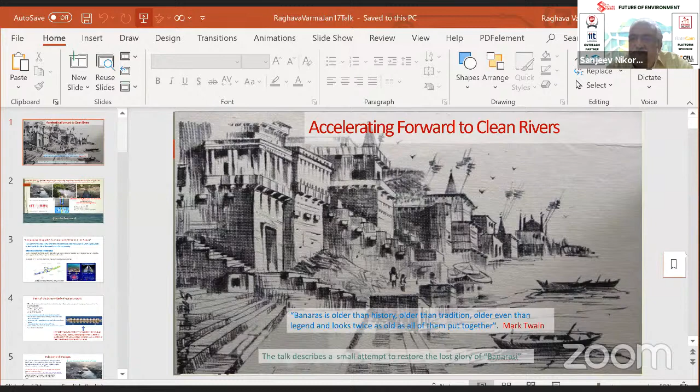You're on mute. Thank you. Thank you so much. I don't know why my video is not coming on. That's okay, sir, it will not come on when you are put on screen sharing, so don't worry about it, go ahead. Okay, yeah, so can you see my screen now? Yes, we can see, please go ahead, sir. Yeah, we can see your screen, Professor.

So the topic of my lecture today is accelerating forward to clean rivers. I would begin with a quote from Mark Twain, that Banaras is older than history, older than tradition, older even than legend, and looks twice as old as all of them put together. There are countries which are spending for a building for their heritage; our whole city is a heritage, and so we are all custodians of that heritage. This is a very small attempt to restore the lost glory of Varanasi, spelt in Pali as Banarasi, from which probably the name Varanasi originated.

So what is this? We want to develop the first of its kind high-intensity compact superconducting electron accelerator in collaboration with scientists from Japan, which will fit into narrow bylanes of Varanasi to transform the landscape, and has many other societal benefits, which I'll touch on in the last slide. These are some pictures of the Assi River emptying its content into the Ganges, and we would like to put a compact superconducting accelerator there.

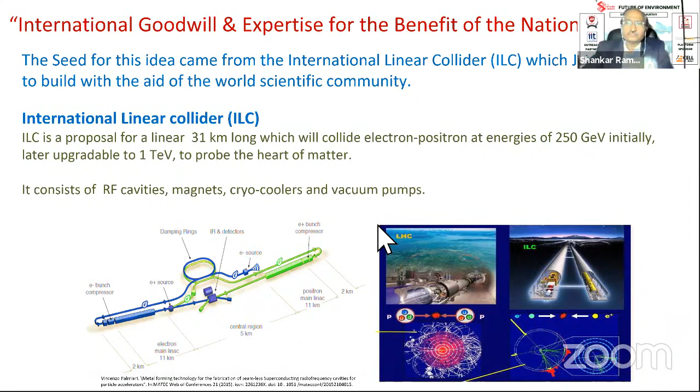For our purpose, it consists of RF cavities, radio frequency cavities, magnets, cryocoolers, and vacuum pumps. The idea is that we can study the properties of the Higgs boson, discovered at LHC, much better, because you will be colliding two elementary particles, electron and positron, instead of composite particles like the protons at LHC.

The heart of the system is the radio frequency cavity, the key element of an accelerator which stores electromagnetic energy and imparts it to charged particles. There are two kinds of cavities: normal and superconducting. For superconducting cavities, the ILC foresees around 20,000 nine-cell cavities as shown in this figure, and they can increase the energy of the electron by 34 million volts per meter of length.

All the points I mentioned are very important for the application we have in mind. These cavities have been widely tested for stable running for more than a decade. The Japanese have perfected the art - they are very compact and very energy efficient. These cavities have been optimized for heat losses and for wall-to-accelerator power efficiency, because the accelerator has to run round the clock, round the year, for several years. All this optimization would be very essential for the application I have in mind, which I describe below.

Use a similar cavity of similar length and similar dimension in phi, and make a superconducting high-intensity accelerator which can accelerate electrons up to 1 to 2 MeV, to treat the effluents flowing into our rivers. So the system becomes very compact, which I will come to.

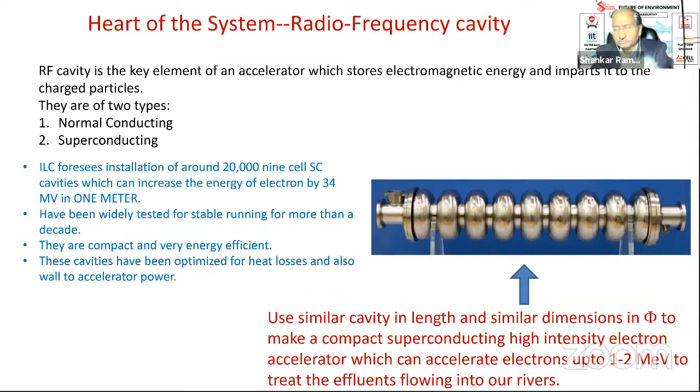Without wasting any more time, I come to the topic at hand, and that is pollution in the Ganges. It is well known - I will not go over it due to shortage of time - that mainly it's the domestic and industrial effluents which are flowing into the Ganga. And Assi is a particular case.

Now, when I performed the last rites of my father, I did take a dip there. And if you take a dip with such high coliform levels, you are very likely to develop antibiotic resistance, which would lead to serious health hazards. So this needs to be tackled immediately.

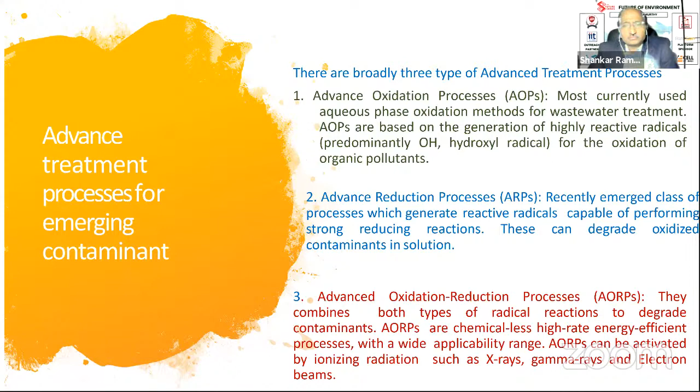And hence it's common sense that they would work better than the first two. So here, just quickly going over these are the conventional water treatment facilities. Bioremediation has come - I have not listed it because it is a green process, but with temperature varying from 0 to 50 degrees, one has to fine-tune it, and it's not so effective if you want to treat coliform. If you see the row on advantages and the row on disadvantages, each one comes with baggage, and that baggage cannot be just solved in one place while disturbing another. Some of them generate carcinogenic waste which could be harmful, or otherwise are just sent to the landfill, so we are creating problems for the future.

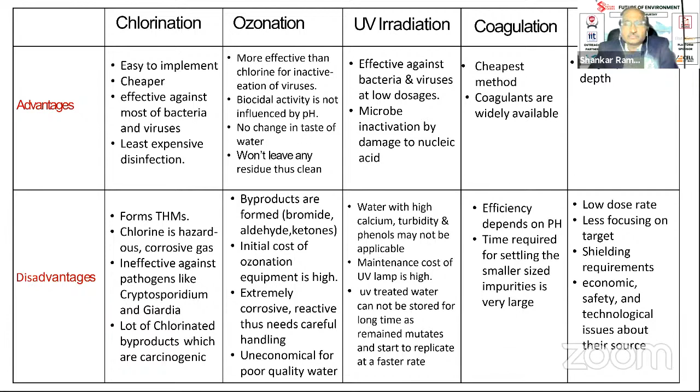So let's talk of these AORP, or advanced oxidation reduction processes. Ionizing radiation is an electromagnetic wave with a frequency higher than 10 to the 17 hertz, or energy greater than a few electron volts, so that the water can be ionized. It can be excited or it can be ionized. The excited water gives you hydrogen radical and hydroxyl radical. The ionized water gives you, again, hydroxyl radicals and aqueous electron, as we call it, hydrated electron.

So hydrated electron and hydrogen atom serve as reducing agents, and hydroxyl radical and hydrogen peroxide, which is formed after combination, act as oxidizing agents. The G value determines how much such radicals would be produced, whether you use a chemical or radiation. And normally it is seen that the G value for these advanced oxidation reduction processes is much greater than conventional oxidation processes, so they'll be more effective.

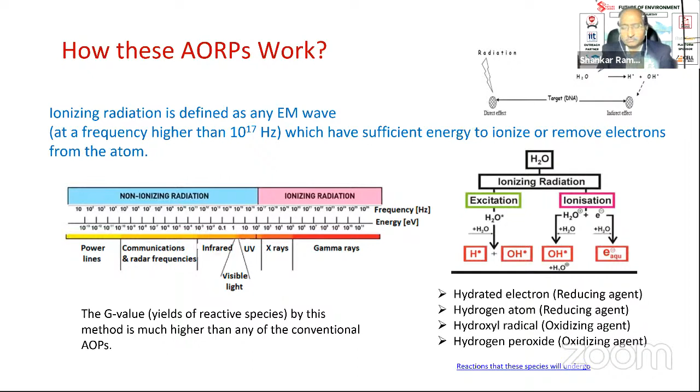So why an electron beam accelerator? First of all, it's an eco-friendly technology. There is no secondary waste generation. We don't need any catalyst and heating. It is compact, reliable, energy efficient, and you can switch it on and switch it off as you wish.

You can also use this instead of needing chemicals such as chlorine. As I said, it is chemical-less, so that is much better.

It removes organic impurities with radiation chemical reactions. It removes color by destruction of double bonds in azo compounds. It removes odor by opening rings in aromatic compounds. The E. coli DNA is destroyed, so there is no question of it mutating. Nearly 100% destruction has been found, and endocrine disruptors are removed. It removes metal by redox conversion, so they take a metallic form, settle down, and you can sedimentate it. So I won't go into further details.

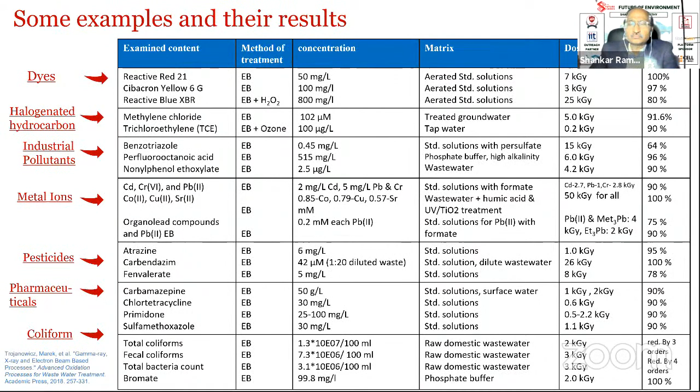I will just present one example. There are many commercial examples, and for sustainability it stands to reason that we should use the electron beam. This is a commercial plant design for wastewater from a paper mill in Korea, and the major product is newspaper. It uses about 18 MLD of water per day. They were using coagulation and then bioremediation, and they could reduce the BOD and COD to 20 and 45, which is slightly higher than what the National Green Tribunal demands.

So what they did was combine it with an electron accelerator, numbered 5, and then a sedimentation step, numbered 6, and they could reach the BOD and COD levels to 5 and 20, with a flow rate of 15,000 meter cube per day. They had to put 3 electron beam accelerators, total power of 300 kilowatts, but they could recycle 70 to 80% of the water, making the process very green, and additional removal of impurities was up to 80% in total organic compounds.

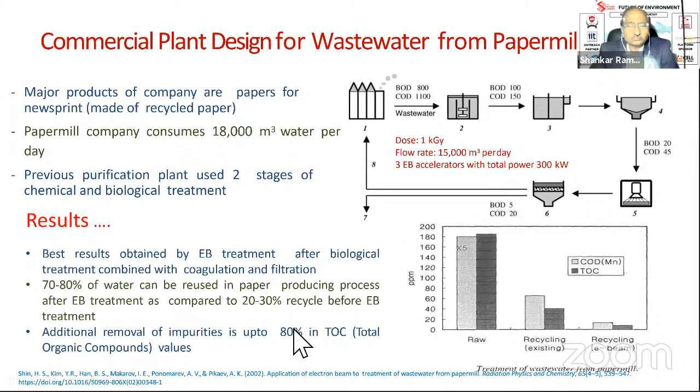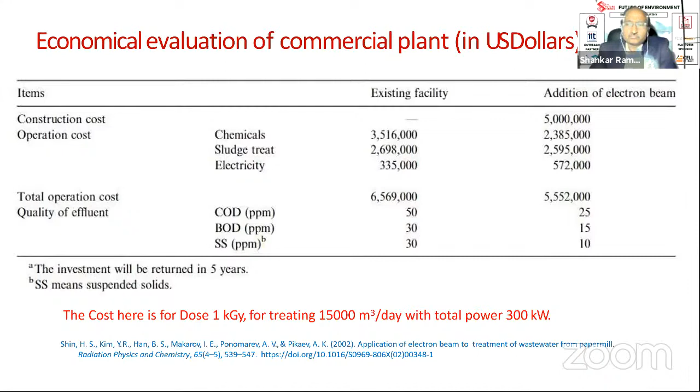The next slide shows that you can have your cake and eat it too, because they claim the investment will be returned in 5 years. So all the cost of constructing it, including equipment and running costs, they could get it back in just 5 years, and then you get much better quality water that you can circulate much more. The paper is from a reference, so I don't need to go further on it.

But there are so many of them I saw over the years. The first study started in the US and then it has spread, but not very fast. Why? Because these normal conducting accelerators become very large in size, and you need very high power to make it economically viable. So the size becomes large, and when you make the size large, the reliability suffers.

Then the cost of shielding for radiation is very high, 40 kilowatts or 300 kilowatts, so you have to shield it, and the cost of shielding goes proportionately high. And then the footprint becomes very large. So it will not be able to fit, for our country, like near a river, if you have seen it there, it will not fit. Footprints become large, and in any case right now with space available at a premium, it always helps to save as much footprint as possible.

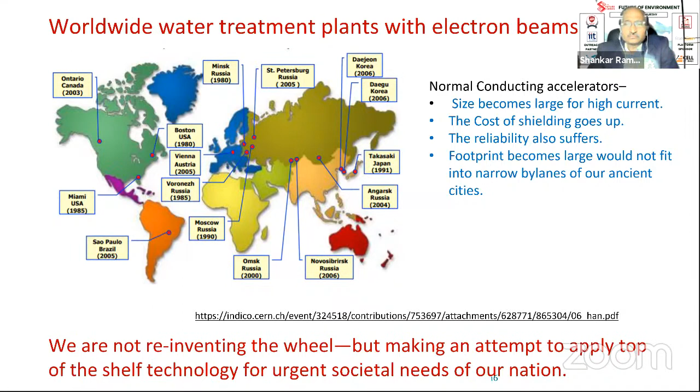So this is our conceptual prototype of a purification system. This is the way you design this cavity, superconducting cavity, which has already been done at IIT Bombay. The fabrication, we don't have such facilities. Normally for superconducting, because they have been optimized for heat losses, the total heat budget that they quote is about 4 to 6 watts.

Commercially, you have available cryo coolers at 2 watts, now 4 watts, and now even 8 watts are available. So by the turn of a switch, we can make this work, because if we had to use liquid helium, then this would not have made too much sense, since the footprint would have become larger.

So you first pre-treat the water, then you irradiate, and then you filter it out, or you post-treat, and then you can allow it to flow.

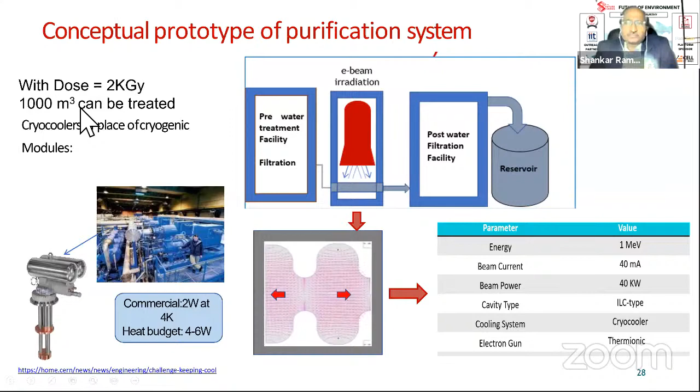We have estimated that we can get about 2 kilo gray, so 1000 meter cube, or 1 MLD, can be treated very easily. The economics, if you have to improve it, there are 2 factors: reduce the required doses.

These experiments we are doing presently, for which he also invited Dr. Ramurthy, is to optimize the dose by combining it with conventional treatment, so that you can work with lesser dose, and you improve the efficiency by going to superconducting.

So higher efficiency, up to 80%, you can get from wall to accelerator power, which results in low current, low cost; high current, high power means more water can be treated. Again, low cost. Typical area occupied would be few meters square, low footprint, again saving in cost.

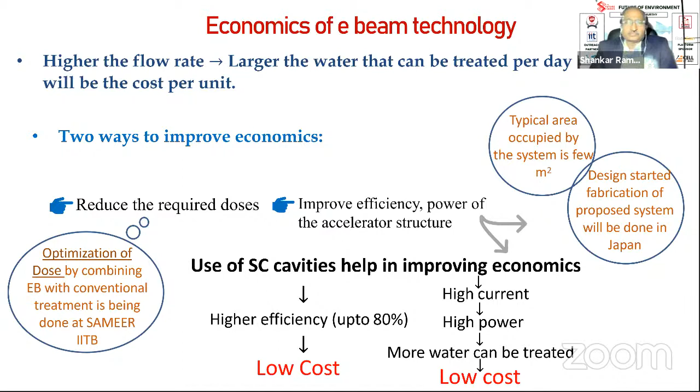So the milestones reached so far: this work is a part of a project that has been submitted on our behalf by the Government of India to the Government of Japan under the Science and Technology Research Partnership for Sustainable Development.

This is a scheme of the Government of Japan. Under this scheme, the scientists in Japan have also submitted a similar proposal to Japan Science and Technology, agreeing that they will work with us on this project.

The project will now be evaluated by Japan Science and Technology, and if approved, would be funded fully by the Government of Japan. It funds only 10 projects worldwide in a year, but we had submitted it last year. There was some lacuna there about a social agency not being part of it, so they had asked us to come again.

Now National Mission for Clean Ganga is a part of the proposal and has agreed to put the pilot plant. They have been very kind at Assi Ghat. SAMEER, which is housed at IIT Bombay, IIT BHU, and Department of Physics BHU are also part of this proposal. We have already designed the cavity at Mumbai, as I showed in the figure earlier.

Fabrication would be done in Japan with our collaboration. We should be able to treat about 2 million liters of water per day. As Assi has a much larger flow, we would be treating only a part of it, so we will have to divert it. National Mission for Clean Ganga has agreed to help us in this and take necessary permission.

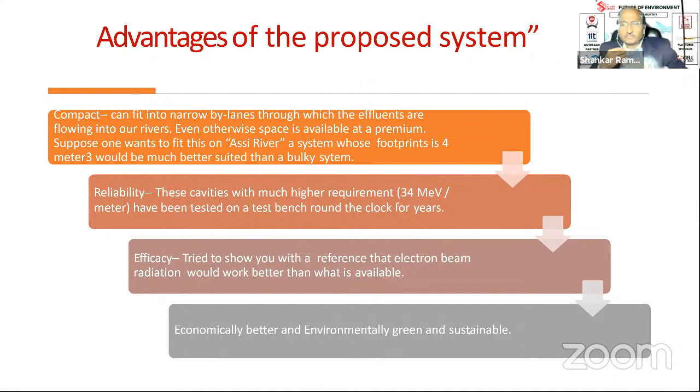So advantages, just summarizing: it is compact, so it can fit into narrow lanes. Reliability - these cavities, much higher requirement, 34 million volts, have been tested on test bed round the clock for years, one reference only, as time permits. It's very efficient, and economically and environmentally it's green and sustainable.

There are other applications. Professor Verma, I think we have just got a complete overview of your tremendous application and creativity in collaborating with the Japanese companies and aligning with Indian requirements, particularly with the Ganges river, which is contaminated in Banaras. It's been a very high level technical revelation to us in what next generation technology in water application is coming, which has always been more construction oriented by the sludge oxidation process, but you have brought a complete revolution with regards to changing and packaging it in a simpler application way.

But of course, the fraternity has to really look into the real technologies and the application. So I congratulate you, Professor Verma, and then we have a long way to go in getting this launched first as a pilot and then next on a commercial launch, so that we bring about really the next generation application, the wastewater treatment. I thank you.

Professor Verma, we will look forward to connecting with you and seeing how this can be more visible to the whole fraternity in the water sector. Thank you.

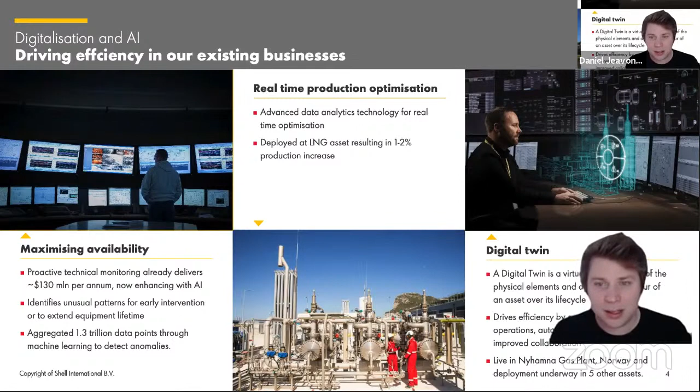But I talked about openness at the start, and the importance of openness. And in many cases, we recognize that many of the processes that we run today need to be monitored, often by external regulators, often by other parts of the business.

In the case of groundwater monitoring, which I thought was a good example to share with you, it's sort of all of those things. We have external consultancies that come and look at the groundwater underneath our assets and our sites. We need them to submit their data in a consistent format. We need to perform consistent analysis on that. And we need to be transparent with the regulators and also with the environmental consultants within Shell to make sure we're making the right decisions.

I think the amazing thing about this example, I think it's an example of the way we have to move forward, is total transparency and open source. And so we've worked with the University of Glasgow to develop what we'd built internally, which we call GWSDAT, as an open source framework. It's now been adopted by the UK government, also in the US as well, and it's growing elsewhere. Many companies have adopted this as a standard.

And effectively what it is, it's a tool that creates consistency. So when we say this is the environmental impact that we see, and we're going to do this to address it, it's completely transparent to the regulator that that is the case, because we're using the same framework to analyze those results, the same data science, and all of that has been subject to audit and review, and it's done in a transparent way with an academic institution. And I think this is much more the way in which we're going to have to do things going forwards.

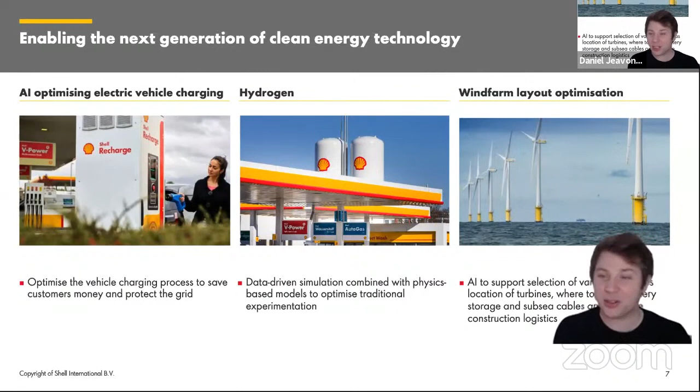And then, of course, we're also investing heavily in wind technology. And as we do that, we need to optimize the layout of these sites to make sure that they generate the maximum power output, and also that they're combined with things like hydrogen and battery technology in effective and sophisticated ways. And again, there we rely heavily on optimization technology, on physics-based models to understand that, and then to design the way in which we're going to roll out these wind farms, and then to make sure that they're operated in the most effective way. So very similar to some of the optimization approaches that I talked about in our traditional facilities, now being applied in the wind domain.

Building on that theme, I also wanted to make clear that we're not trying to do this all by ourselves. I talked about openness, and I think the key thing here is that we are trying to work with partners in academia, with startups, and many of them in India, to bring in the best ideas, because these environmental and energy problems we have as a society are not easy to solve. In many cases, we believe the technology is not fully there. So what we're pushing for is a number of approaches whereby we can bring in brains like yours to work with us to help solve some of these problems.

So last year we ran the wind farm layout optimization hackathon. If you haven't seen that, check it out online—it's on our website, and you can also find it on LinkedIn if you search back through posts. The key thing about that hackathon is we particularly focused on India and asked some of the brightest minds to look at some of our data sets and say, what are we missing? What are the better ways of approaching this problem? We got some fantastic results from that.

We're trying to repeat that this year with Game Changer, again looking at waste management and how we can help frontline waste workers, particularly in India, with solving some of those really tough challenges you face, and trying to open source some of the data sets we have around that.

And then we also have a startup program called E4, where we run annual cohorts of startups. We invest in those startups, we mentor them, and we look to accelerate their scale-up, particularly in the energy sector.

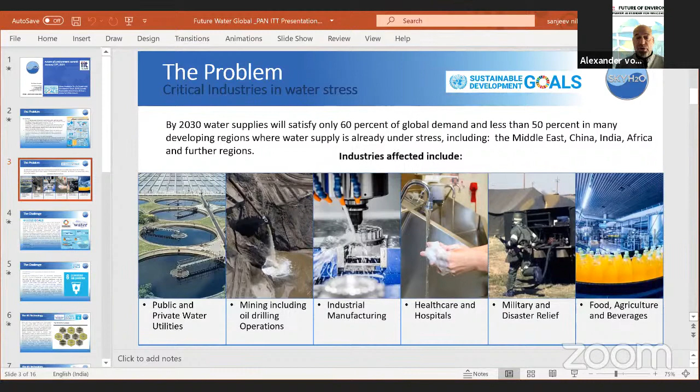And the third way is what we're doing at Sky H2O, and that's atmospheric water generation, which is essentially squeezing the water out of the air. We can go to the next slide, please.

The air has a very significant amount of water in it globally. Some would say that there's essentially as much water in the air, in the atmosphere, as there is almost all freshwater sources combined. And with climate change, with temperatures rising, we have much more evaporation, which is creating even more water in the air. In fact, it's been proven or said for every 1 Celsius increase in global temperatures, we end up having 7% more water in the air. In fact, this additional water in the air is the primary culprit behind the dramatic weather changes that we're seeing, where storms tend to be bigger and stronger.

So it's that water in the air, which is the resource that atmospheric water generation uses to create fresh water. Next slide, please.

Atmospheric water generation, as opposed to any other technology, is really game-changing in its business model or applications, because now, really for the first time in the history of man, we can make water at the location where the water is needed without having an original source of water. So again, the real difference between atmospheric water generation and any other form is any other form requires an original body of water, be it a river, a lake, groundwater, ocean, etc. In the case of atmospheric water generation, our resource is the air, which is everywhere.

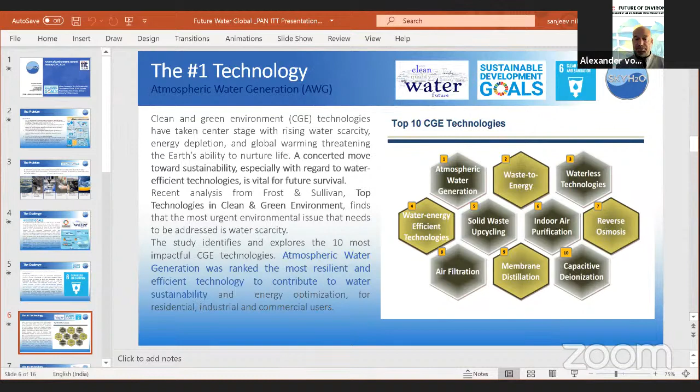And I draw a very similar comparison to atmospheric water generation. It can be rolled out quickly and at the locations where needed. Next slide, please.

So again, Sky H2O, our mission is to be the world's greatest supplier of atmospheric water generation systems. And what we're doing is we're scaling this young new industry to make bigger systems, to make more water.

So if you look at the competitive landscape of this young new industry, you might find a dozen or so companies around the world, including a couple from India. But what you'll find is most everybody is only able to work with small systems that might be appropriate for residential or some small commercial application. At Sky H2O, what we're doing is we're making bigger, more robust systems that work very well for larger commercial, industrial, and government type applications.

We have, as a starting point, introduced to the market about a year ago our flagship system that we call the Maximus AWG. That system essentially looks like a 40-foot container, and it's rated to produce up to 10,500 liters of fresh water a day. Let me explain the rating for a moment.

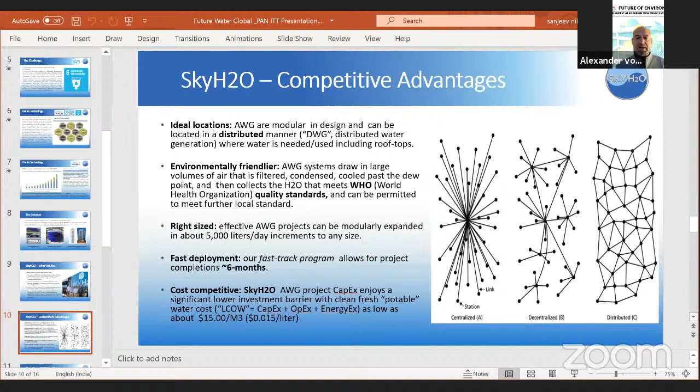Atmospheric water generation mimics nature. It's a renewable resource and works in harmony and balance with nature.

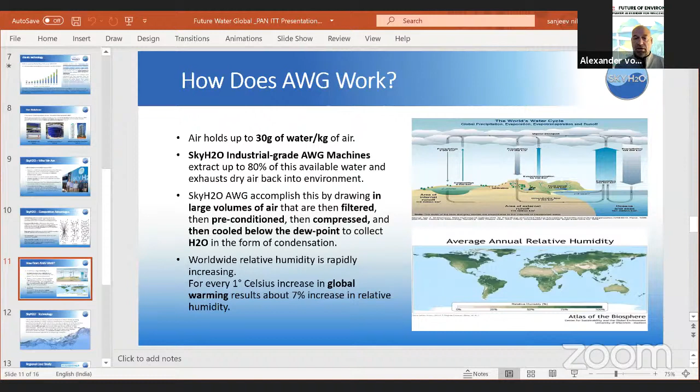Sky H2O is a California innovation company. We possess significant amounts of intellectual property. We have designed, invented, engineered from the ground up our own technology, our own systems. We started our business in 2016, including help and collaboration from some very prominent professors and scientists from University of California, Berkeley, as well as Stanford University. Our chief science advisor is Chancellor Professor Tarek Zohdi, the head of the engineering college at UC Berkeley. And what we've essentially invented is what I describe as an air-to-water engine, which we believe is the most efficient and practical in the world for commercial or industrial scale atmospheric water generation.

Alex, meanwhile, I just wanted to intervene with a question from one of our audience. Maybe we can take that quickly. The question is, will there be any significant impact on local microclimate and ecology due to dehumidification of air by collecting water from air? That's a very good question.

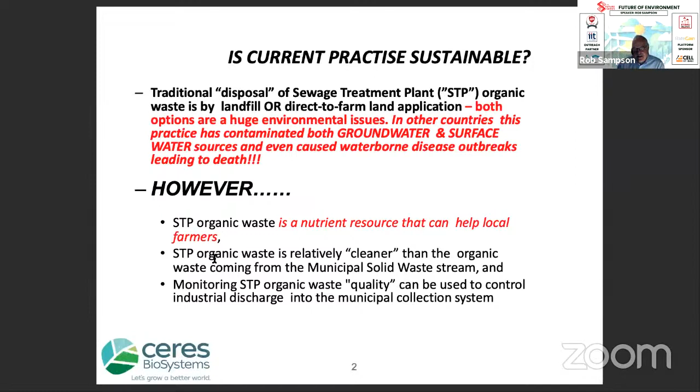So the practice of landfilling or direct farm application is not exactly sustainable, nor is it safe. But we do know that sewage treatment plant waste is actually an interesting source of organic material that farmers could use. In fact, it could be said that sewage treatment plant waste is much cleaner than the organic waste that can be sourced from the organic component of our wastewater, of our waste stream.

So our technology was created a number of years ago in Canada here to promote the change of thinking from organic waste as a waste stream to it being a resource stream.

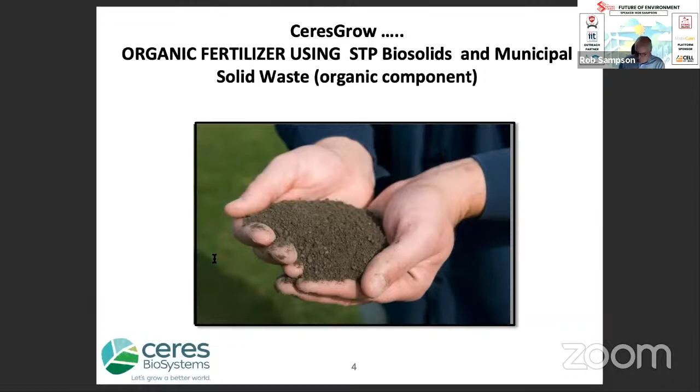So why is this a sustainable solution to organic waste? Well, our product, which is called CeresGrow, retains essentially all of the nutrients that are found in the organic waste itself, versus commercial fertilizer, which when applied to the field, the majority leaches out into the water system. About 60% of a urea application will not meet or reach the root system of a plant. It will leach out or simply not be absorbed by the plant.

And so, in fact, when you're spending $400 or $500 Canadian for a ton of urea, you're spending a lot of money for a product that will not actually fertilize the product.

Our process actually provides a credit, a GHG credit of up to 2 tons for each ton of organic waste. But commercial fertilizer has a rather high carbon footprint. We reuse organic waste, while commercial fertilizer consumes a non-renewable resource. There is only so much phosphate in the ground in the form of a phosphate mine. Reusing organic waste will minimize wastewater discharges and contamination to water sources. Commercial fertilizer, as I said earlier, a lot of it ends up in our water stream.

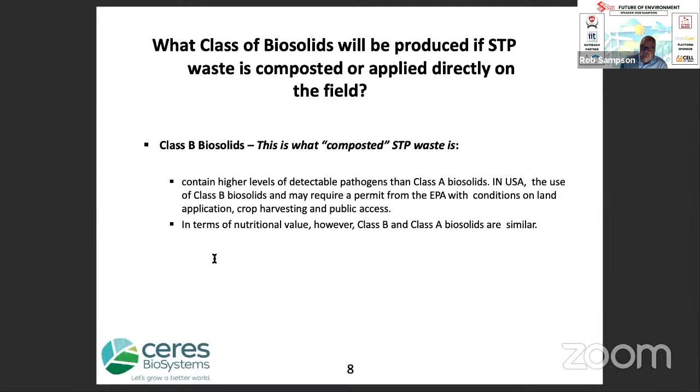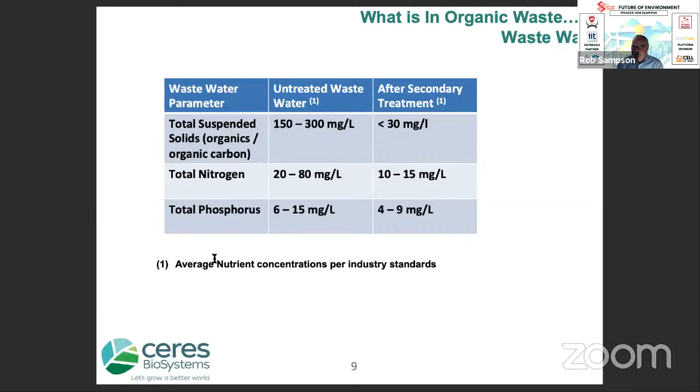And if we take those numbers, using your population in India of approximately 1.3 billion people, about 200 liters per day per person on average being produced by individuals, then this is the total volume of these components alone that is in the waste stream.

980,000 tons a year of nitrogen, and that would be organic nitrogen, by the way, not inorganic nitrogen. 2.9 million tons of carbon, 590,000 tons a year of phosphorus. And this is a yearly volume. Every year that material is now currently being disposed of in a landfill, primarily, or not recovered and dumped in a water stream, or being applied untreated to farmers' fields.

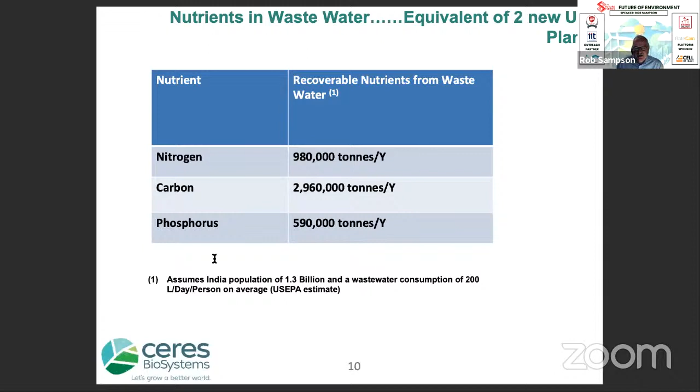This volume is the equivalent of 2 brand new urea plants each year in fertilizer volumes that we could harvest, literally harvest, and apply to the fields in India.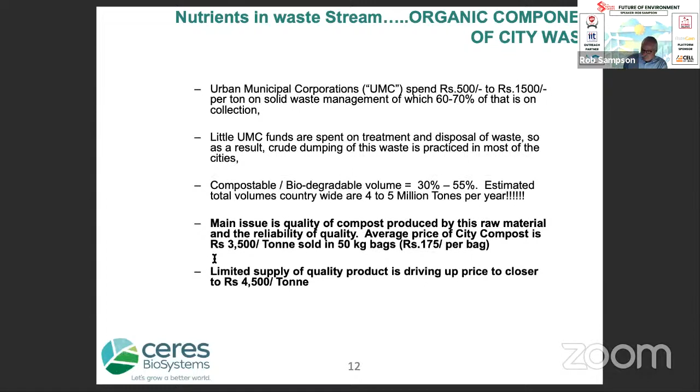So there's a final source of organic material, and that's organic waste from the actual farm itself. In India, like in many parts of the world, agricultural waste is being converted into a sustainable and non-polluting cheap energy source that is lighting up the villages and changing a lot of lives. I think you actually have a presentation today about bio to energy.

Agriculture waste can also be reused not only as a fuel source, but as a nutrient source for the fields. So field waste can include weeds and straws. There can be animal waste from the farm as well, which is animal manure and animal waste. And then there can be industrial waste coming from the agricultural source, which would be sugarcane waste and molasses. I think in some parts of your country, the sugarcane waste is actually burned just to get rid of it.

So what's the value of this product? So yeah, you can make a product. So is it any good, and why would the farmer bother to take it?

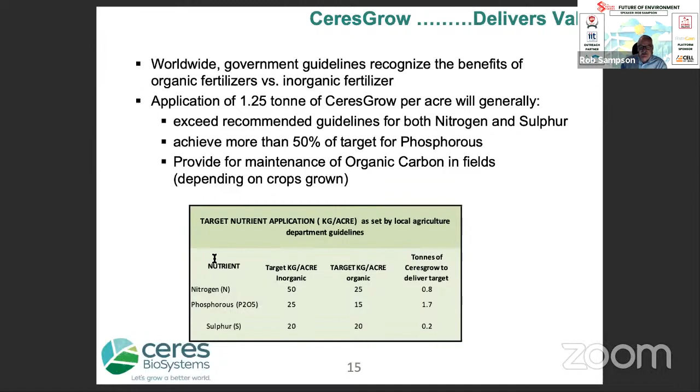It may mean you're applying 5 bags of our product versus 1 bag of urea if all you're looking for is nitrogen, but you're using a totally renewable product, and it's a sustainable process because each year those volumes of nutrient, of nitrogen, coming from the wastewater stream are there.

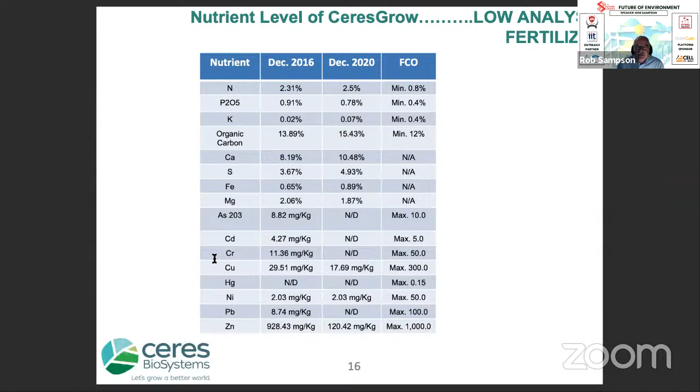The nutrient concentrations are relatively low. The test results show we have 2.3 to 2.5% by volume of nitrogen in the product. Carbon would be anywhere between 14 to 16%. So it's not a high concentration product, but these are all organic nutrients. There's a huge difference, as some of you may or may not know, between inorganic nitrogen and organic nitrogen as it relates to how it behaves in the field and how the plant will actually absorb that material.

This slide deck will be available for you to look at shortly, but I need to move along to give you some video pictures of our actual production process.

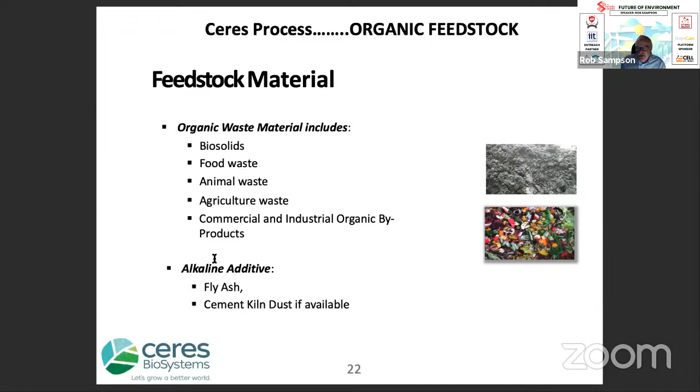So if I go back to this chart, the first step is really a chemical process that was created in one of the universities in the US. Our first step is to kill the pathogens in our product, in the wastewater raw material. We do that through a process where we add alkaline material to the wet organic material, and a natural thermal temperature rise and pH rise is created. Those two stresses kill the pathogens.

By the way, when I say pathogens, this COVID virus we're all trying to avoid and eliminate is a pathogen. In North America, we're now tracking the number of COVID cases in the community by looking at the presence of COVID in the wastewater stream. There's an extremely high correlation between a high community case count of COVID and that pathogen being present in the wastewater stream. This process kills COVID, and it kills all pathogens.

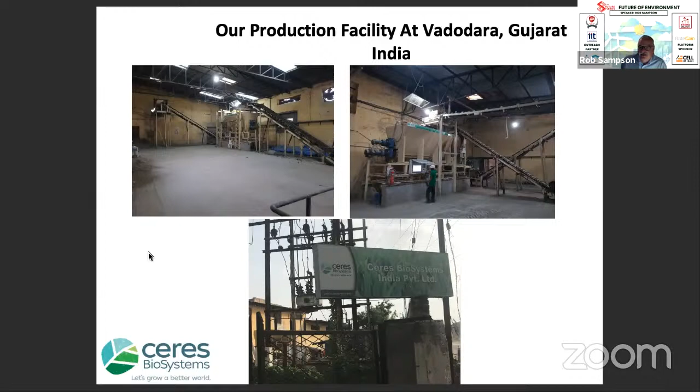This picture on the left is the second mixing process, because in the first mixing process we've created a product that's got a reasonably high pH. We need to bring the pH down because the fields and soils in India are not all that acidic, so they don't need the pH adjustment. So we mix it again with another organic waste material, the pH is reduced, and a final product is produced.

These are our holding cells where the mixed material sits and the final product sits. The mixed material for the first mixing step is in the left-hand picture, and the picture on the right is the final product as it comes off the second mixer.

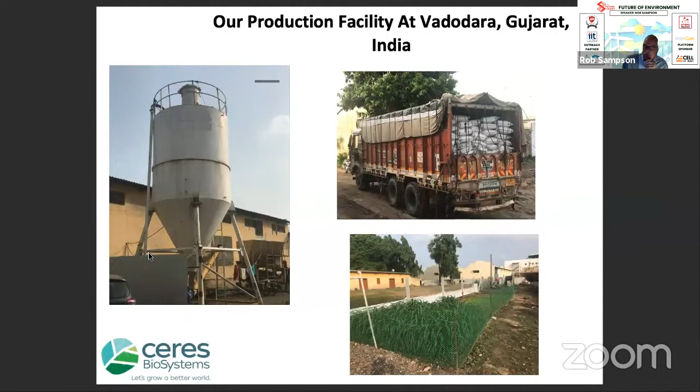We've done a little test field at our production facility, and you can see we're actually showing crop yield increases of 2 to 3 times what would normally be applied, or what you would normally see if the product were not applied.

Thank you very much for the presentation. We could see the impact from your short presentation on the sludge that can get converted into a very valuable and useful material with regards to the agricultural ministry.

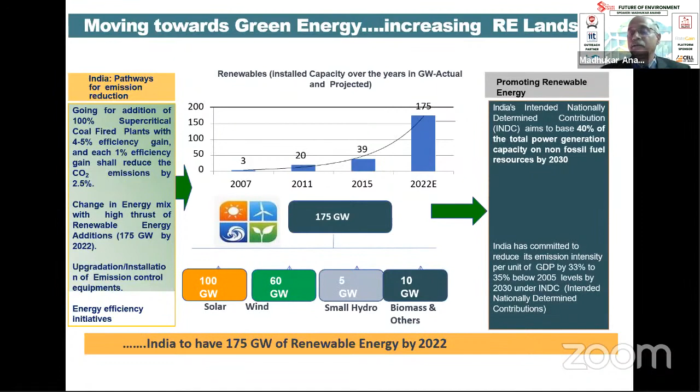Basically, howsoever renewable energy may grow, coal is going to remain the mainstay of energy for India till 2050 at least. Because with renewables, this solar storage system, battery energy storage system, or hydro pumped storage systems—they are all under an evolutionary phase, and it will take time to come.

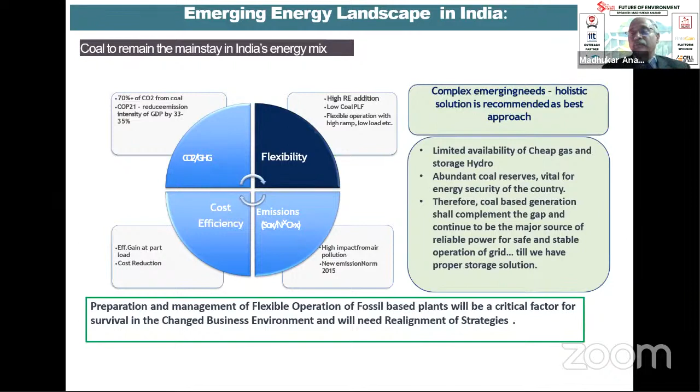So as we know, the major things we will need to concentrate on are carbon dioxide and greenhouse gas emissions. Then, because of the influx of renewables, we will have to gear up our plants for flexible operations. There will be cost reduction—we will have to ensure power becomes affordable, and NOx and SOx emissions also we have to control.

This was basically what I told you—that we have to reduce the emission intensity of our GDP by 35%, and the share of non-fossil fuel based electricity, that is basically renewables, to 40% by 2030. And we are all well on our way to achieve it.

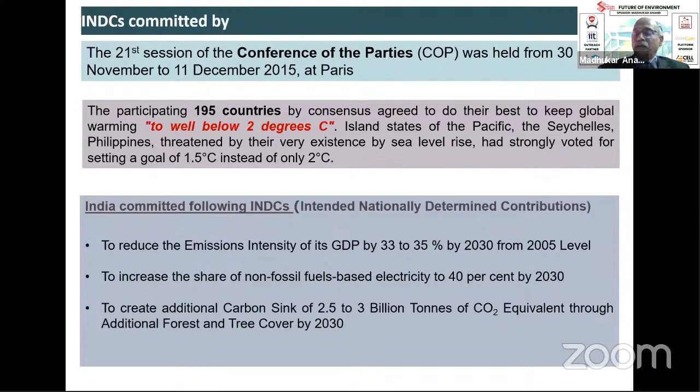Now for this, what planning have we done? We have done conservative planning up to 2032, in stages. First of all, we have to decarbonize our economy. For decarbonization, we will have to reduce the CO2 emissions intensity significantly—by 2032, from the present 2012 levels, we'll be reducing it by 17%. Renewable capacity, from our present portfolio of around 65,000 megawatts, is going to be around 30% at that point in time.

Then we will have only super and ultra-supercritical plants—we'll be gradually phasing out all subcritical and non-reheat units. Then for air emissions, we will be reducing sulfur dioxide, achieving reduction in specific NOx emissions, and reduction of particulate matter. You know it was approximately 100 ppm, so now we are targeting 30 ppm, and we are still hoping to go down further.

Regarding water availability, fuel power plants account for most industrial water consumption, with power plants being the major consumer. So what innovative technologies can reduce that water consumption? We have taken steps - previously it used to be around 4 to 5 meter cube per hour per megawatt. Now the Environmental Ministry, in consultation with us, has reduced it drastically to 3 meter cube per hour per megawatt, and we hope to do even better, because we are dispensing away with cooling towers and going for air-cooled condensers.

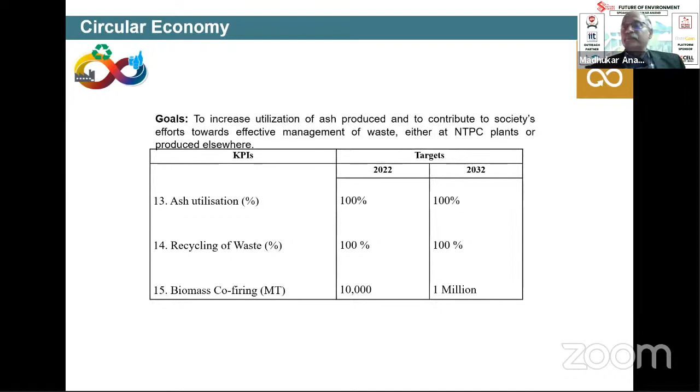And biomass firing - in the last presentation, we talked about turning biomass into useful products, fertilizers, etc. But as you know, in Delhi or NCR region during this period, there is a lot of open firing of biomass. Agri residue waste is fired, and because of parali burning, the atmosphere becomes very polluted - the AQI level goes up to 500 and 1000 levels. So we have initiated steps to convert that biomass into pellets and then fire it in our furnaces.

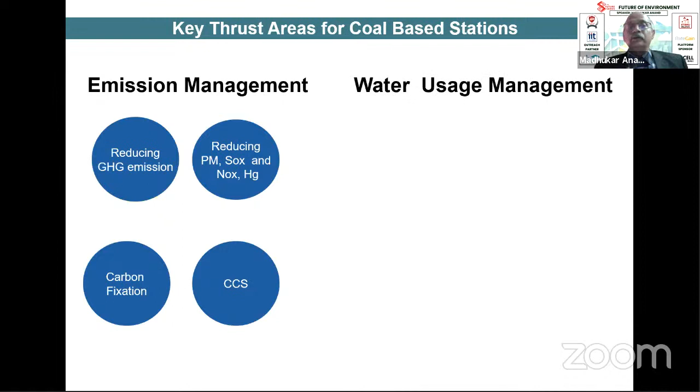So the future focus is on emission management and water use management. These are the basic considerations on which we base our power plant design.

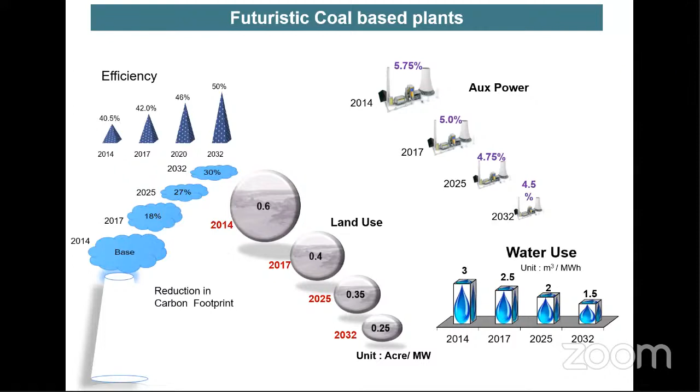If you see what our journey is going to be - by 2032, efficiency levels which are approximately 40% now are going to around 50%. Similarly, we'll reduce carbon footprints by 30%. Land area, which used to be approximately 1 acre per megawatt, has come down to approximately 0.35 acre per megawatt, and we propose to go further to 0.25. Water consumption - as I told you, we are going to reduce it even below 2 meter cube per hour per megawatt. And auxiliary power consumption, of course, we are going to reduce.

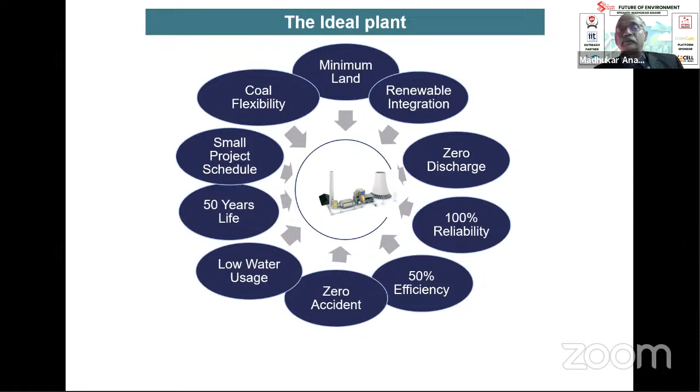So what an ideal plant would look like: minimum land use, renewable integration, zero discharge, 100% reliability, higher efficiency, low water usage, and approximately 50 years life of the project.

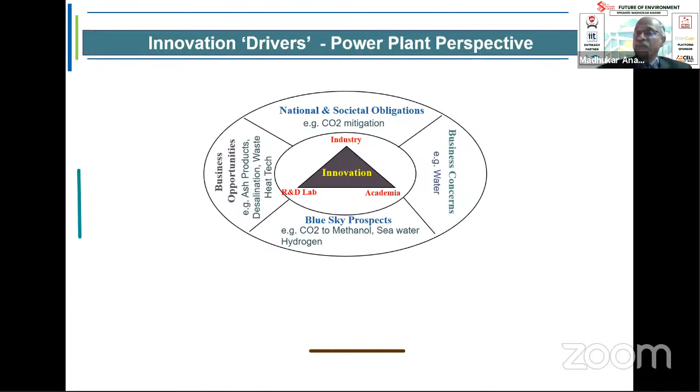Of course, we are doing desalination and wastewater treatment. And you'll be happy to know that even at Varanasi, at Karsada, there's a municipal solid waste plant which has been taken over by NTPC, and we have established a 24 TPD per day plant where we are generating around 200 kilowatts of power based on municipal solid waste. Biomass-based solid gasifiers already exist, but we have for the first time demonstrated that we can run it on municipal solid waste also. So this has been our journey.

I'll give this presentation for you to go into in detail, but basically our journey has been that now we will go big for solar, reduction in CO2 footprint, and then we will have to progress with energy storage systems.

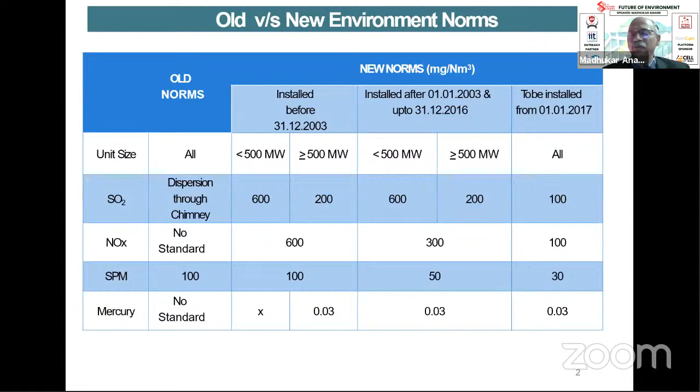Consumptive water requirement is coming down to 3 meter cube per hour, and with the advent of air-cooled condensers, we will be reducing it further. All our plants are bound to be zero liquid discharge, and wherever there is a sewage treatment plant within municipal boundaries, like our Mouda plant or Sholapur plant, it is mandatory for us to use sewage water for our process requirements.

Now, ash production was one of the biggest challenges. Ash production was gradually increasing, and right now it is around 235 to 240 million tons.

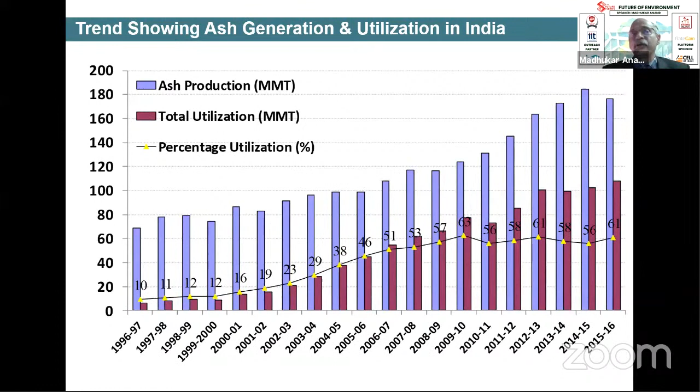This is what Professor Shankar Murthy was asking about, the efficiency improvements we have undergone. Previously our focus was on emissions control, where we took up stack height norms, ESP design customization, then NOx control, mercury control, flue gas desulfurization. Then for efficiency enhancements, we enhanced the unit parameters, considerably improving the modified Rankine cycles.

The advanced ultra supercritical plant we are going to set up at Sipat will have parameters of 310 bar, 710 degree main steam temperature, and 720 degree reheat temperature, which is one of the finest unit parameters in the world. You'll be happy to know that India is in the leadership position for this.

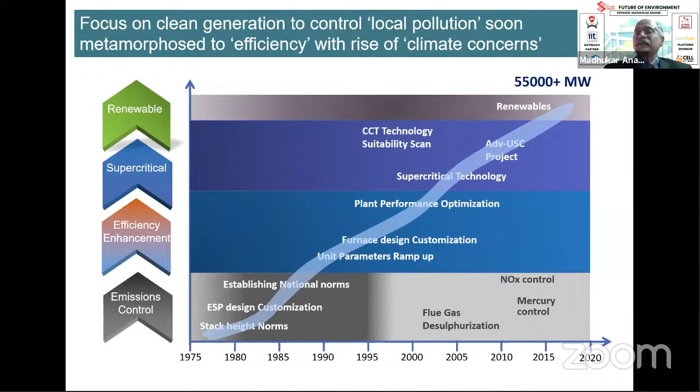Then supercritical technology, then IGCC, and of course renewables. This has been a journey. From 1900 onwards we were lagging behind, but with the advent of BHEL and NTPC in the 70s and the 80s, we caught up with the world, and now we are in a leadership position regarding advanced ultra supercritical technology.

This is how the efficiency curve has improved. Subcritical efficiencies used to be around 37.9%, and now we are operating at around 42.2% and 46%. Of course, turbine cycle heat rate efficiency will be more than 50%. And the carbon reduction we have been able to achieve, and will achieve, will be around 17%.

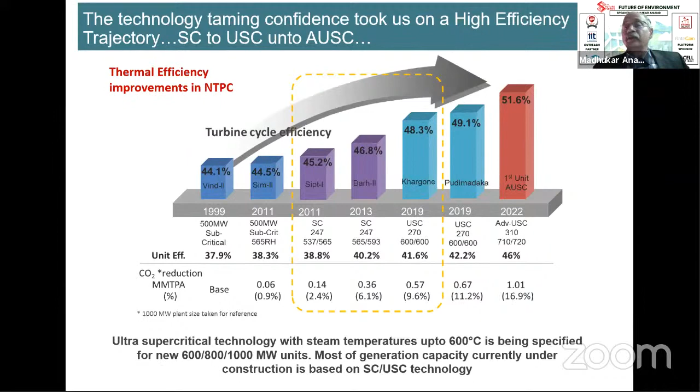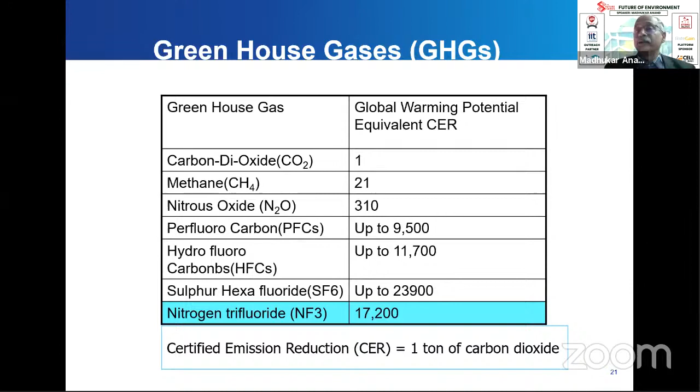There is a lot of focus on carbon dioxide, but when we talk about greenhouse gases, carbon dioxide is not the only gas. If we take the global warming potential equivalent, carbon dioxide has a potential of 1, but methane, nitrous oxide, perfluorocarbon, hydrofluorocarbon, sulfur hexafluoride, and nitrogen trifluoride are in multiples of hundreds and thousands of times that of carbon dioxide. So we have to address these issues also.

If we do not address this carbon issue, our carbon dioxide concentration, which is around 400 now, will go up to 1000, and the temperature increase will be in the range of 2 to 5 degrees centigrade. So it is imperative for us to go in for superior technologies.

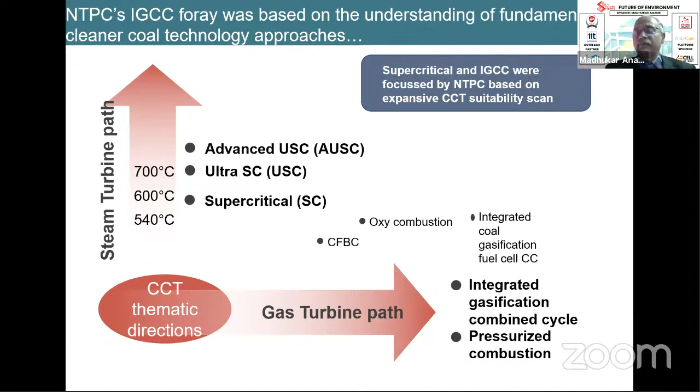This is the two paths that we as a power sector have consciously explored. One was operating parameters, developing new technologies and new materials for sustaining high temperatures, like Inconel, P92, etc. that we are developing. The second was the thematic direction, like IGCC and the gas turbine path. So let me give a brief overview of the Indian Advanced Ultra Supercritical program.

It is a collaboration between NTPC, BHEL and IGCAR, where we are aiming for an 18% reduction in carbon dioxide, with 1,500 crores involved in the first phase. All research has been completed.

Now we are into development of boilers with advanced high temperature materials, design and development of indigenous turbine blades and metallurgy with Inconel materials. Mishra Dhatu Nigam is also developing that for us, and we have successfully developed specific welding joints, etc.

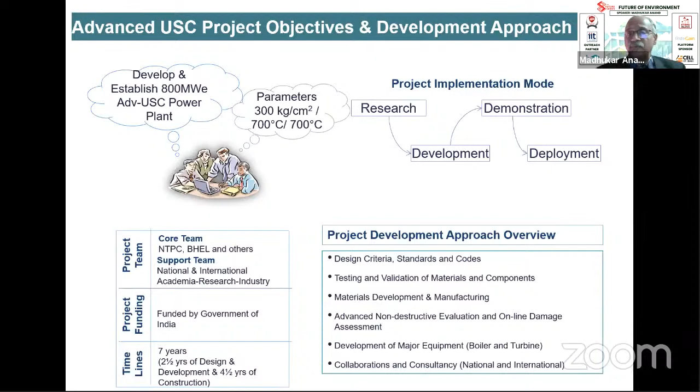We are moving well ahead, and by 2022 we are trying to set up the first demonstration plant at Sipat, which will be of 800 megawatt capacity.

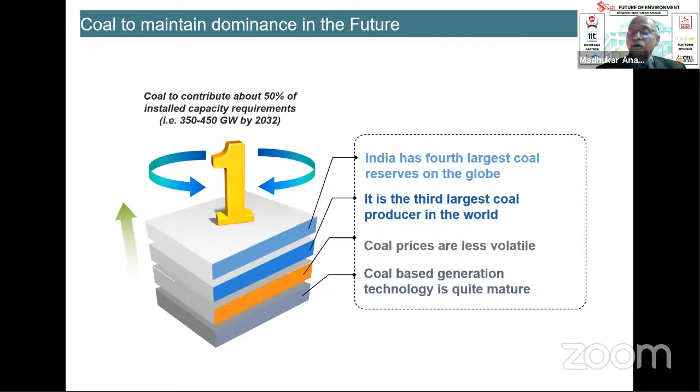Coal has an inherent advantage in that if we take care of efficiency and carbon emissions, the prices are less volatile and you are assured of a steady power supply, which is not the case with renewables.

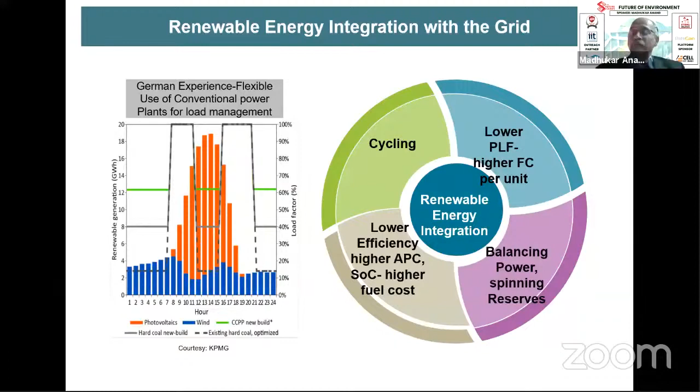So renewables, if you see now it is around 88,000 megawatt, but then it comes with a host of problems. All your existing plants will undergo cycling, then balancing power, spinning reserves, then you will have to create separate open access for that, so those transmission costs etc. So their cost is not less, plus the recycling cost, the manufacturing cost of solar panels etc. also have to be kept in mind.

Batteries, of course, if they come, they will definitely become viable. There are certain things like batteries, flywheel, pumped hydro, to certain capacities they have matured, but supercapacitors, flow batteries, compressed air are still under development. These are a must for development for utilization of solar and wind energy on a commercial scale on a regular basis.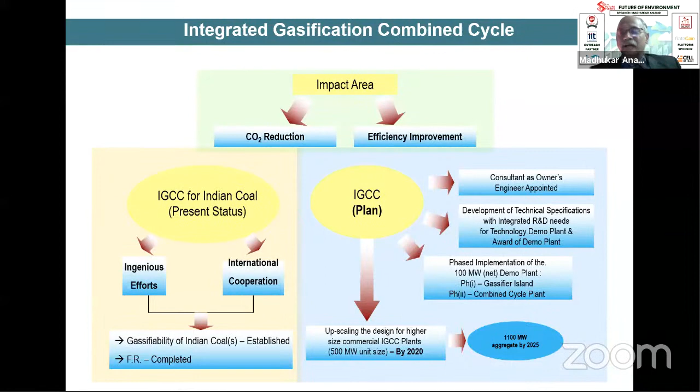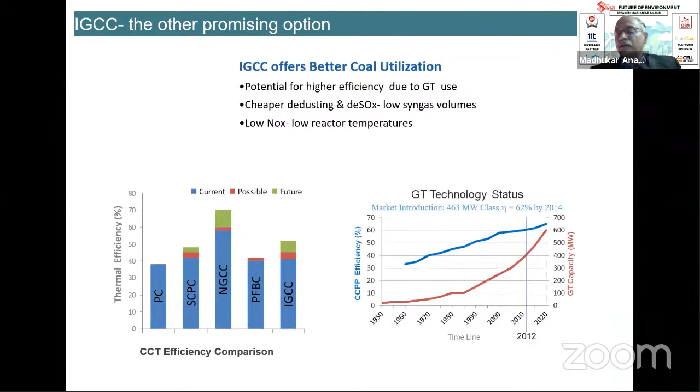This is what IGCC I told about, that is integrated gasification combined cycle power plants. We had done a study for 100 megawatt, and we proposed to set it up at Dadri, but it was somehow delayed. But we have all the studies completed. This definitely gives an improvement in efficiency, where we directly gasify coal and fire into the gas turbines. So this will give you advances. There are different processes where sometimes the gas turbine is replaced with solid oxide fuel cells.

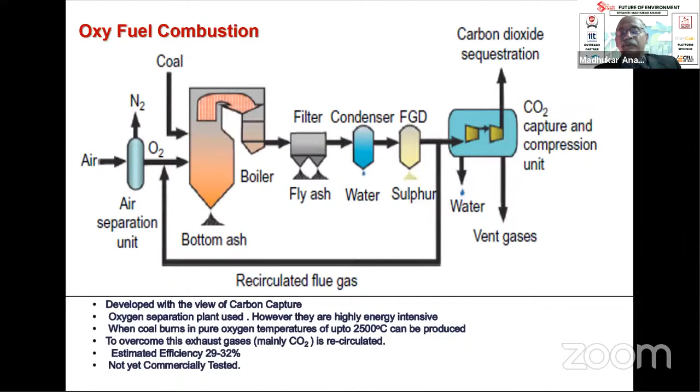Because of paucity of time, I'm not going into very details of these technologies. Then, of course, circulating fluidized-bed combustion boilers are also there, and their efficiencies are also quite high. And because of low temperature combustion, the generation of SOx and NOx is also less.

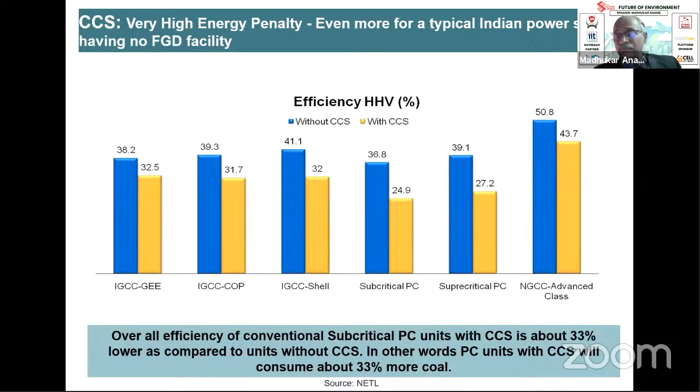Then carbon sequestration, of course, is there, but carbon sequestration has got a heavy energy penalty. If we take carbon sequestration into account, the cycle efficiency or the plant efficiency reduces by approximately 30%.

So what opportunities does it afford us? Carbon dioxide is something that is available free of cost in our flue gases. So we have taken up a project on how, rather than sequestering it, why not use it? We have developed technology for capturing this carbon dioxide, and then using it, reacting it with hydrogen, developing indigenous reactors and catalysts to produce basically methanol.

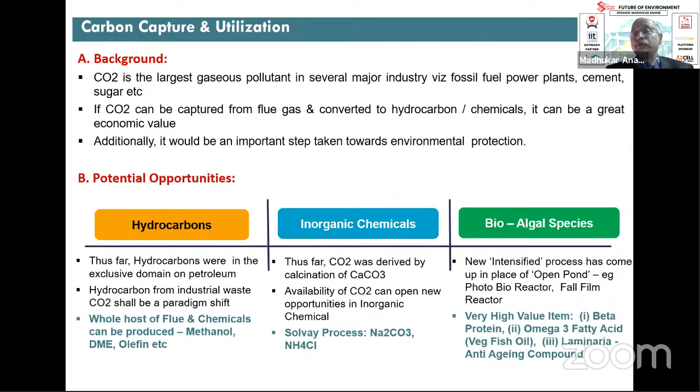I'm sure that India is heading towards a methanol economy, and the price that we are getting, basically from the feasibility studies, will be much lower than the market prices of methanol that is available. And we can further convert it into dimethyl ether, which can 100% replace diesel etc. Similarly, by capturing through bio-algae methods, we can produce a lot of nutrients and omega acids etc. as well.

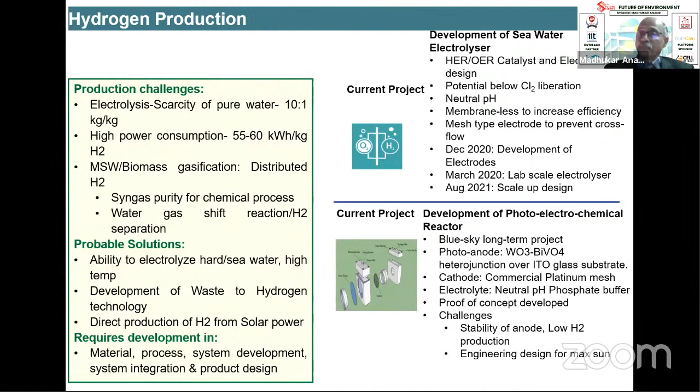There are challenges, of course, in this. Green hydrogen, if you convert and get hydrogen from the basic steam reformation process, which is the normal practice, it is very energy intensive; or by electrolysis, it is also very energy intensive. So we are targeting getting it through green energy, through solar energy, and we are setting up a center at Ladakh, where we'll be driving EV buses with hydrogen, and that hydrogen will be generated through green solar energy.

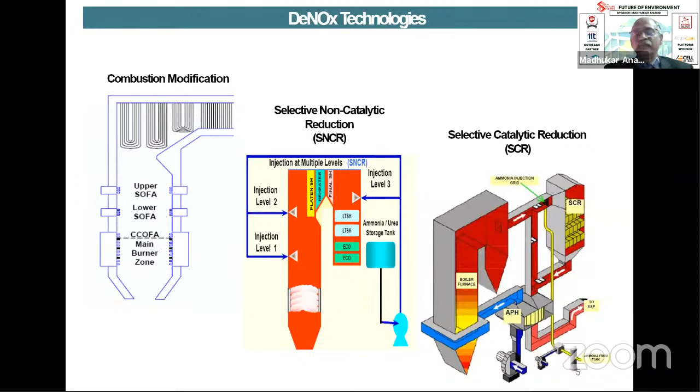So this is all what we have been doing. Regarding SOx and NOx, for all our plants, NTPC is at the front line. We have developed technologies and deployed them at a vast scale, and we will be the first to achieve it in the country. Our Dadri and Jhajjar plants, Vindhyachal, Bongaigaon have already achieved it or are on the verge of achieving it. So there are a lot of technologies in FGDs.

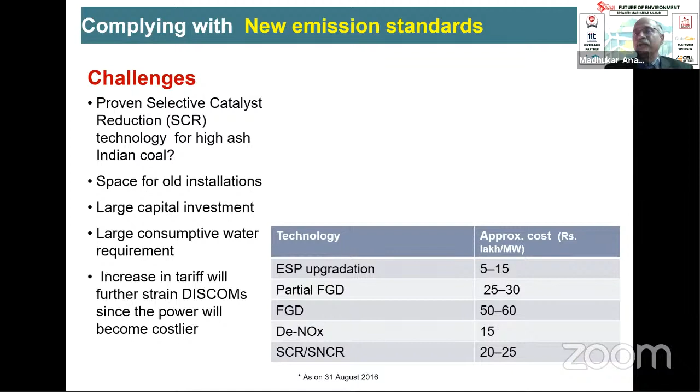But NOx has become a bit problematic because of the high ash Indian coal content, as the catalysts etc. in our pilot studies are getting poisoned. So the NOx reduction of 100 milligrams per normal meter cube that has been envisaged by MoEF does not seem to be possible, and the ministry has taken cognizance of that, and they will be relaxing it to 350, which we can achieve by combustion modification.

Water, of course, we said that we are reducing it. And how do we use it? We reduce, reuse, and recycle.

Mr. Shankar, you can always tell me if I am running out of time.

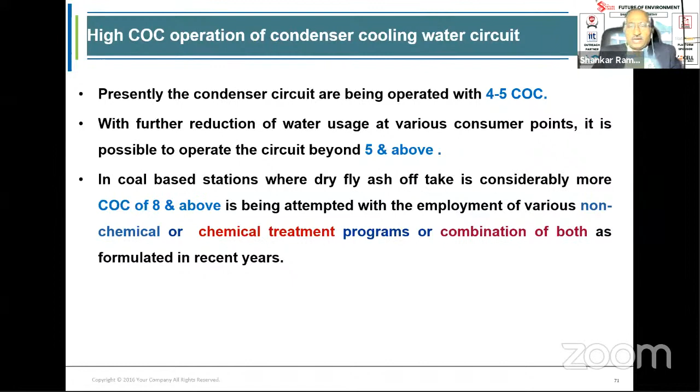I think we have got a real overview, Mr. Anand. That was an excellent presentation in the time slot.

Just take 2 minutes of time. That in ash, of course, we know that a lot of ash is there.

Apart from the fly ash bricks we discussed in the morning sessions, we have developed geopolymer concrete roads, where we can use ash and replace cement totally. We have also developed lightweight aggregates, where 80 to 90% of aggregates can be replaced by fly ash, which will be a huge benefit for the country.

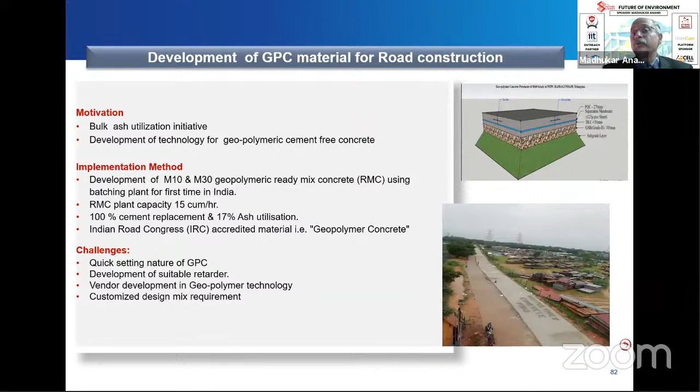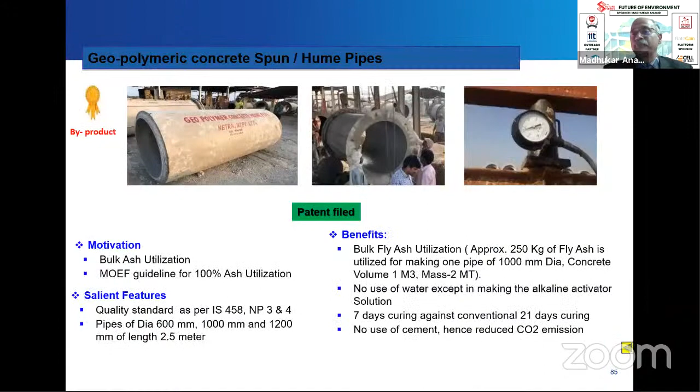At Ramagundam plant, we converted a road into an M30 strength road using these materials. Similarly, we have used bottom ash as a partial replacement of sand, since sand is becoming a scarce resource commodity. We have also developed geopolymer pipes and geo-tetra pods.

So a lot of things are there. I would request, if I get the opportunity, to share a lot of the developments and innovations that have taken place. We can get into that. Thanks a lot.